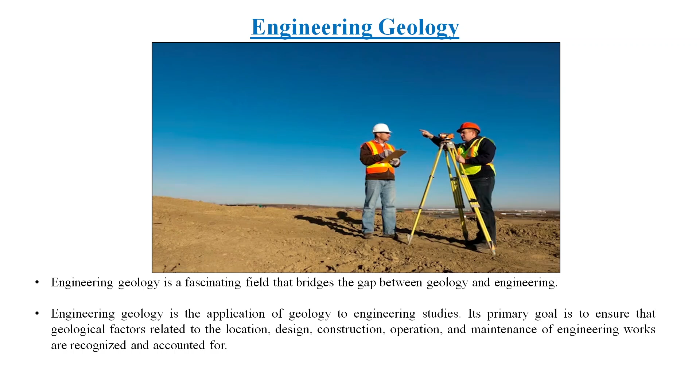So, the engineering geologists provide recommendation, analysis and design related to human development and various structures. It has a direct impact on society itself. In earth structure interaction, they study how natural processes might impact human made structures and vice versa. Their work spans from planning to environmental impact analysis and management, design, construction, and even the post construction phases once a tunnel or dam has been made.

Engineering geologists assess geological hazards, material properties, landslide, slope stability, erosion, flooding, dewatering, and even sometimes seismic risks. So, the principal objective of engineering geology is the protection of life and property against damage caused by different geological processes. They play a crucial role in ensuring safety and stability in large scale or small scale infrastructural projects.

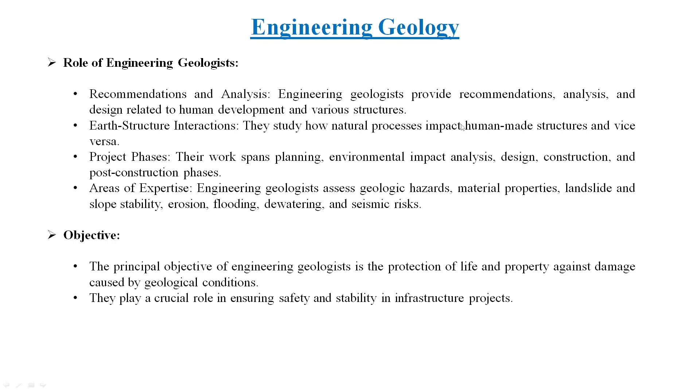So, the first thing that we need to discuss is the stability of a slope, because that is very essential, be it a horizontal one, a vertical one, or any slope with any angle in between. It is extremely necessary to assess that before construction of any infrastructural project, even for example making a house in a hilly terrain. If the slope is stable, then only it is wise to build a house or even bigger scale projects on that slope. Otherwise it is extremely risky, even if it is made up of concrete or whatever material you are using.

So, by definition, slope stability is a critical aspect of engineering geology that deals with the ability of a slope or hillside to withstand the downward movement or collapse of soil and rock materials. Slope stability refers to the condition in which an inclined slope can withstand its own weight and external forces without experiencing displacement. So, if there is no effect of the external factors on the slope, then possibly it is a stable slope. It involves principles from rock and soil mechanics, geotechnical engineering, and engineering geology.

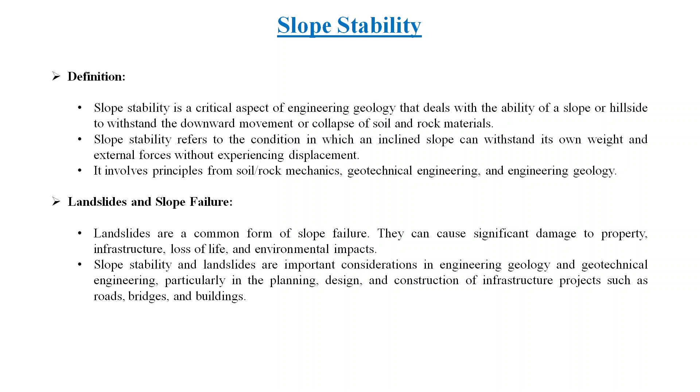So, there are various ways a slope can undergo failure. We talked about landslides and different kinds of mass wasting processes, how we have seen earlier, even without any external factors, simply under the action of gravity, your slope can slide, rocks can fall from above, and different cliffs might become unstable and glide as well.

There are various types of landslides that we generally study to assess the stability of a slope, like we discussed in our discussion on mass wasting. I will not repeat that, but just to mention, you have several types of landslide like rock fall, rock slide, debris flow, mud flow, earth flow, creep, slump, and even some complex landslides when two or three or more processes are involved in the same landslide event.

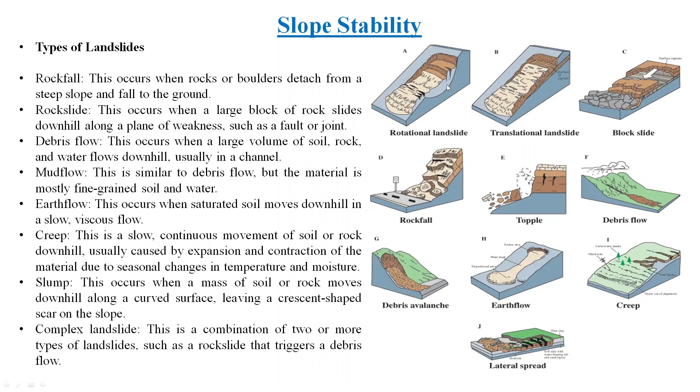Factors that influence slope stability are the geology and soil properties, and hydrological conditions, meaning the water content in the soil or in secondary porosities like joint planes. Slope geometry, the angle of repose, is also important—if the angle exceeds the angle of repose, it is possible that slope will no longer be stable.

Seismic activities like earthquakes and other seismic activities might also trigger a landslide, and that is actually due to instabilities that were already present in that particular slope. So seismic activity can also trigger landslides.

Human activities, which are now the main focus or main problem of modern times, like excavation, construction, mining, or logging can alter the stability of slopes and lead to instability and failure. This is extremely important because if there is no pre-planned idea through which you are excavating a zone or constructing a road, that road or rock cliff across which you have made the road can become highly susceptible to this kind of slope instability.

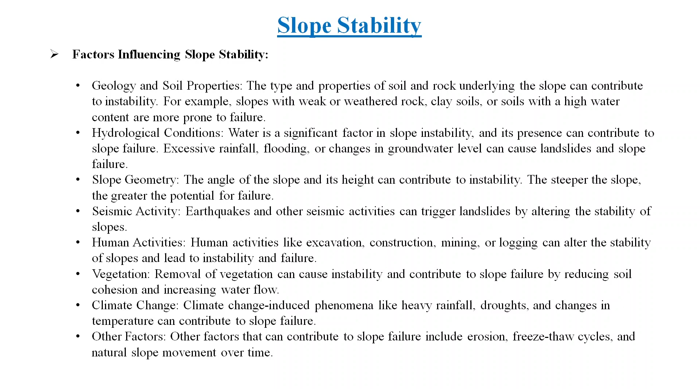Climate change induced phenomena like heavy rainfall, torrential rains, sometimes droughts, and changes in temperature can also contribute to slope failure. Other factors like different processes of mechanical and chemical weathering—erosion, freeze-thaw cycles, and natural slope movement over a period of time—may also result in slope instabilities.

These are assessed based on several techniques. I will not go into detailed techniques because they are mainly used at an advanced level, but I will deal with the understanding of the subject and how, just by looking at geological information, you can assess whether a dam will be stable or not, whether a tunnel will be stable or not, whether a bridge will be stable or not, or what the preconditions or requisites are for construction of a dam, tunnel, or bridge.

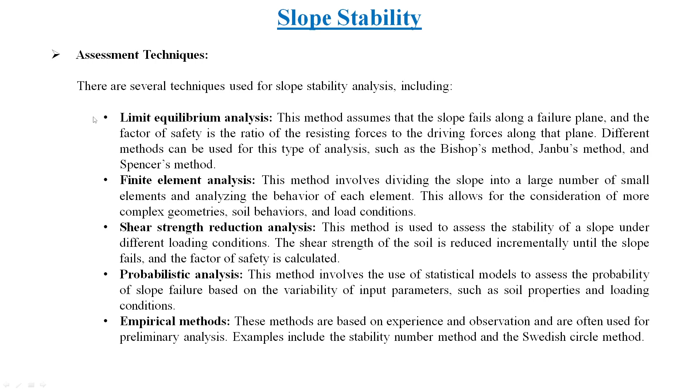There are different analyses—just to mention, limit equilibrium analysis, finite element analysis, shear strength reduction analysis, probabilistic analysis—and some empirical methods are also available to judge the slope stability of a region. But I will go with the fundamental idea from a geologist's perspective.

So in time of torrential rainfall or some percolation of water, this unconsolidated bed might simply get destabilized from its present position. Dressing the slope of the same can make it stable.

Sometimes drainage channels are made to provide ways for the water, so that it does not percolate within this weathered and unconsolidated sediment cover. These drainage channels are prepared on the surface or top surface of these terraces or road cuts, so that whatever water comes down during a rainfall or torrential rainfall gets drained directly to some nearby river, pond, or stream, so that it does not penetrate or infiltrate through the soil, and there is no chance of creating further instability.

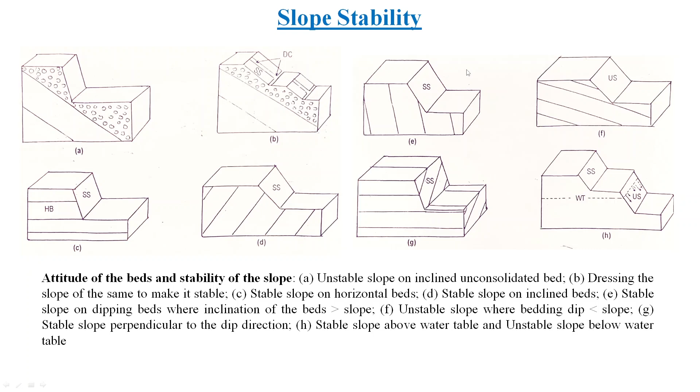So these are the geological considerations that are important to reflect the stability of a bed. But if you want to do a very precise quantitative analysis, you have to go for the different methods that we just mentioned. We have not discussed that in detail, and that can only be discussed when you look into engineering geology at a much advanced level. So here, for our understanding purpose, we will only be comparing the orientation of the bed and the orientation of the slope you are dealing with. Based on that, you can say whether your slope is stable or unstable in nature.

To mitigate slope instabilities and reduce risk, we can improve the drainage and vegetation cover, construct walls or stabilization structures, and alter slope geometry through grading or excavation. We can reduce the angle of a slope—simply if I cut the upper part of that slope, obviously it will become gentler. So a steeply dipping slope has more chances of instability in comparison to a gently dipping one.

In extreme cases, consider relocating infrastructure away from high risk zones. If there's no way you can control this instability, it is better to shift away from that location. You can find an alternate path for your road cut or something else, or as a foundation rock, you should avoid slopes which are already unstable in nature.

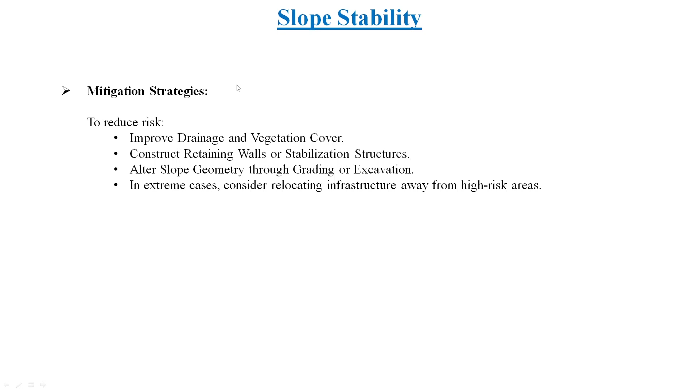So the idea of foundation rock, whenever you are making a small house, or a large scale dam, tunnel, or even bridges, the foundation on which the rest of the project is based is extremely important. So the idea of rock foundation or foundation materials is important.

Your foundation rocks are the bedrock or substratum upon which structures are built or will be built. They form the base or support for buildings, bridges, dams and other infrastructural projects. These rocks are selected such that they provide stability, load bearing capacity, and resistance to deformation. The choice of foundation rock depends on factors like geological condition, load requirement, and type of structure.

Again, if you are talking about foundation rock, we know there are only three kinds of rocks: igneous rock, sedimentary rock, and metamorphic rock.

Igneous rock examples used as foundation stone include granite and basalt. The whole city of Mumbai is actually resting on the Deccan basalt, which provides a very strong foundation for the high rises along the coast of Mumbai. Metamorphic rocks like marble and some gneisses are also very favorable foundation stones.

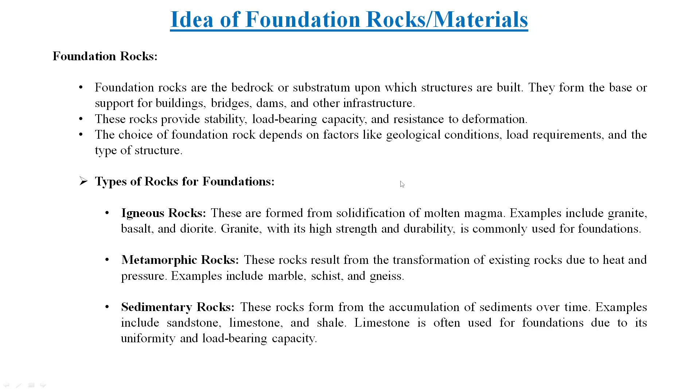The properties considered for selecting the foundation rock are strength, stability, permeability, uniformity, jointing, and fracturing. If there is a uniform strata with no discontinuity or breakage in it, it will be a better foundation compared to a fractured and jointed bed.

If the permeability is less, the percolation of water or movement of groundwater present is minimum, so it will not induce any kind of weathering into the impermeable rock. So impermeable rocks are also considered good foundation rocks or materials.

Engineering considerations include site investigation, foundation design, and site selection — where you will get this kind of foundation rock. For example, if you are building a bridge, what is the narrowest channel width that can support, with the help of good foundation rock, a bridge in the long term.

Then there are other considerations like environmental impact assessment. These are the role of an engineering geologist.

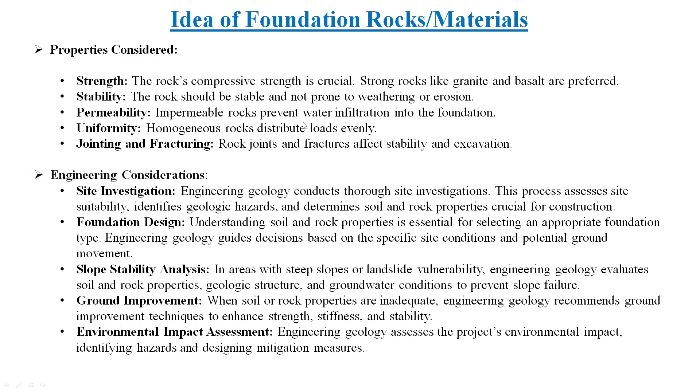Common foundation materials, apart from rocks, have been used since the early Stone Age and since the Iron Age when people started using concrete. Earlier, people used to rely much on timber or wood, but later in the Iron Age we started depending on concrete, steel, gravel, and crushed stone.

These materials are sometimes melded together and mixed to give you a foundation material that is even sometimes stronger than a normal igneous or metamorphic rock. This is possible with the help of cement, sand, and other materials that bind together very strongly, like we generally prepare concrete out of it. So these are definitely your common foundation materials.

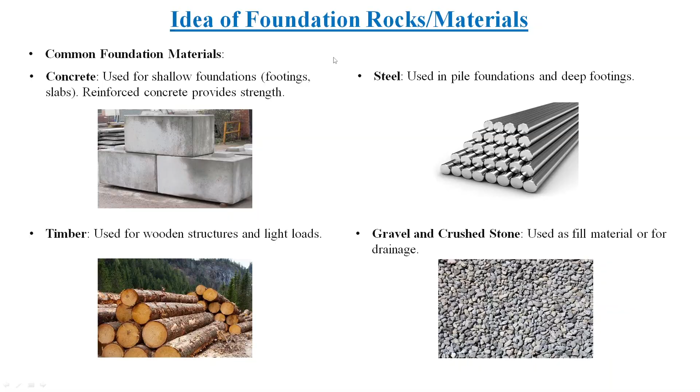Now I will go into the second part of our discussion, where we will mainly deal with dams, tunnels, and bridges, and the geological considerations before building such large infrastructure. Thank you for this part of the discussion.